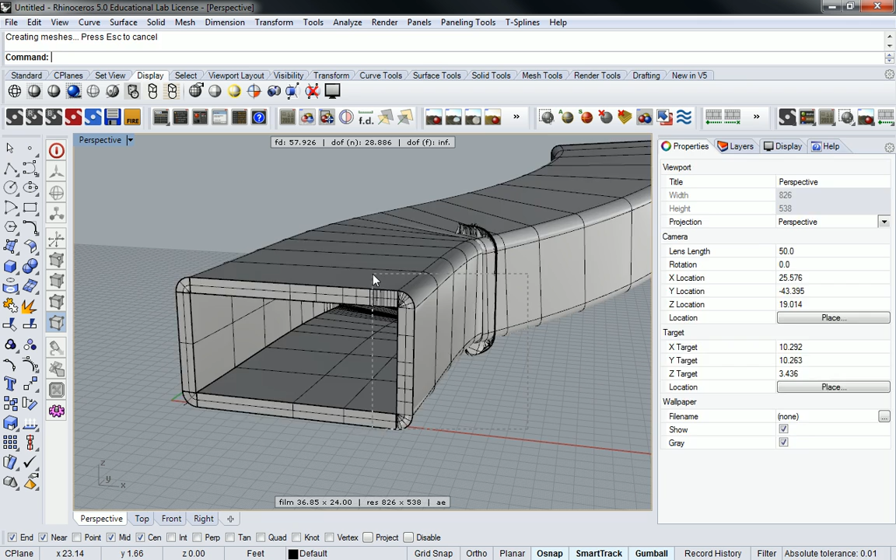You'll notice I have a lot of my Maxwell stuff up. I'm probably going to leave the panels on my toolbar and not worry about it, but I will turn off this heads-up display because that's going to be really annoying. If you recall, that's this toggle button right there to turn off those settings in the perspective view.

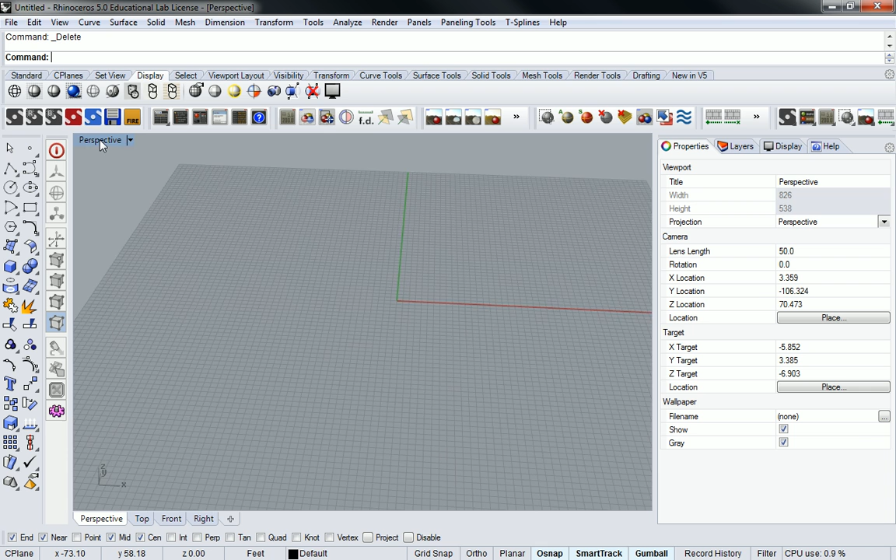Some of you guys have been asking about how project works, right? This is going to be a way for you to start using project as a way of controlling the geometry. So I'm going to create a simple tubular structure that just steps up in elevation. Then I'll show you some of the features Rhino has to actually blend and smooth certain surfaces.

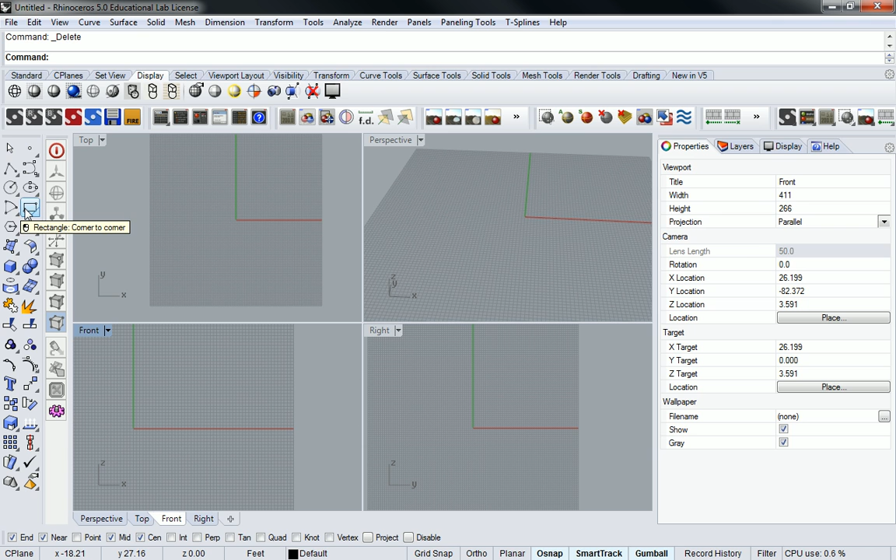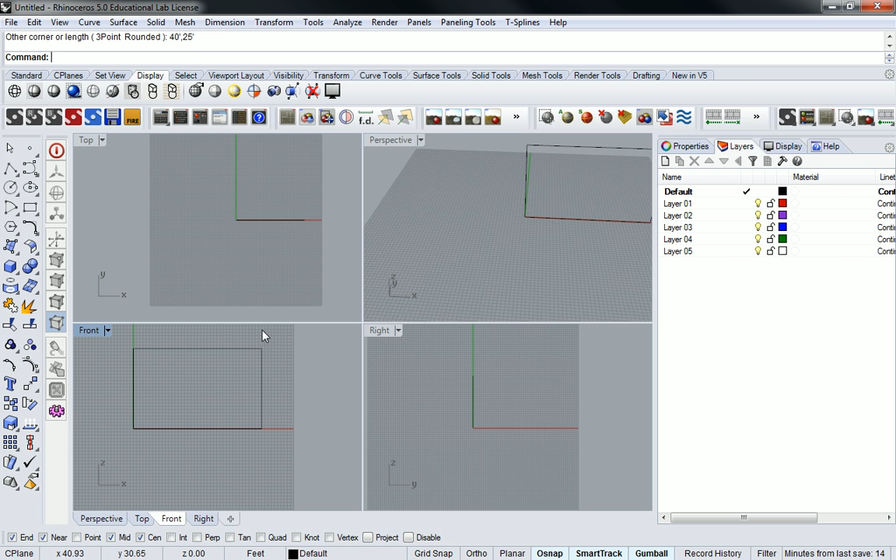Let's start with basically just a profile. We're going to create a rectangle, but since it's architecture, I want to create it in the proper plane, the front view. So this front view is where I'm going to start. All I'm going to do is create a rectangle, set it to 0,0, and make it something like 40 feet wide by 25 feet tall.

So what am I doing with this? I'm creating these tubular structures, and all I'm going to do is step it up once and then carry it off to the side. But first I've got to make that first leg. So all I'm going to do with this, with the gumball, is use it to create an extrusion.

If I hit the Alt button and click and hold it, guys, hold it, then click on the green arrow, I could create a duplicate and then loft the two together. But if the distance isn't necessarily critical, if I want it to be sculptural but also controlled, I can just Alt click and then hold Shift and drag it, and it actually creates an extrusion instead.

Yeah, it's weird, I thought there was a different hotkey for it. I thought there was a way you could hit them both and click the button to make it go and it would extrude. But for some reason it wasn't working for me the other day. I tend to get mixed up with these after time, but you have to hit Alt, click on the axis and hold it, then hit Shift and drag it. It's weird, I'll go back and do it again.

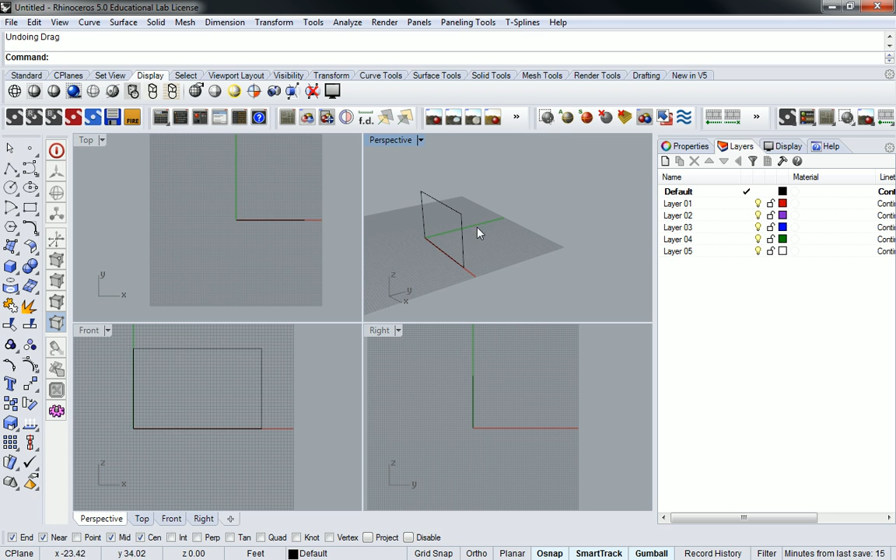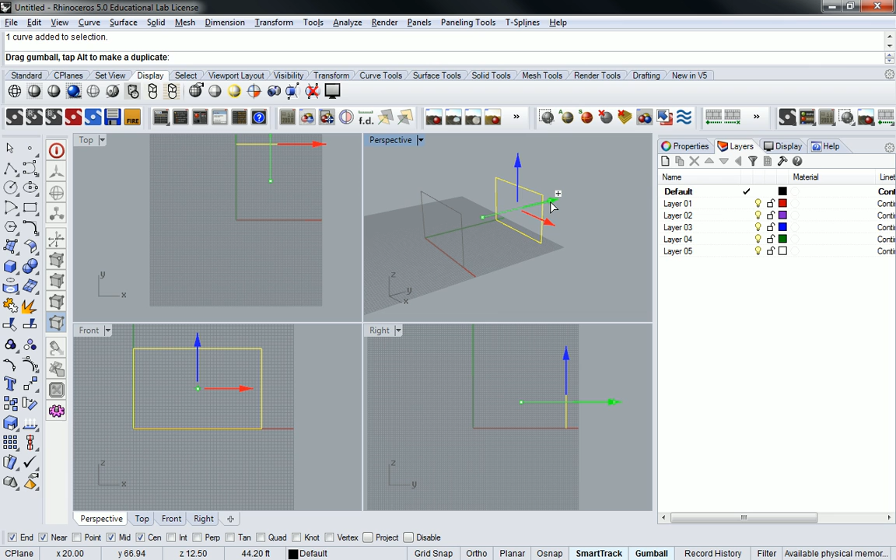So you select that, Alt button, hold it, click it, hold it. Oh, I said Shift—it's actually Control, my mistake, I had to look down on that one. Sorry. I'd be a really bad piano player. Anyway, hold Control and drag it back, and it'll extrude. If I mess that up again, guys, just shout it out and correct me, because long day. Any questions on that so far?

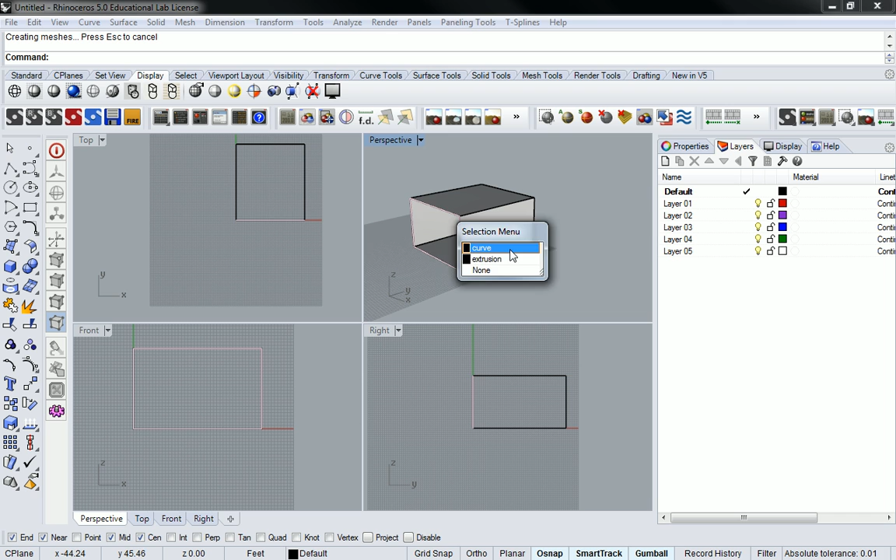Here's the cool part, or at least what I think is the cool part. I can simply grab this curve, copy it to the back side of this thing, and then just have at it and go for more. There are a few ways you could do this, you don't technically have to copy it, but simply put, I'll just copy this and put it on the back. And then I have this back one that I can work with.

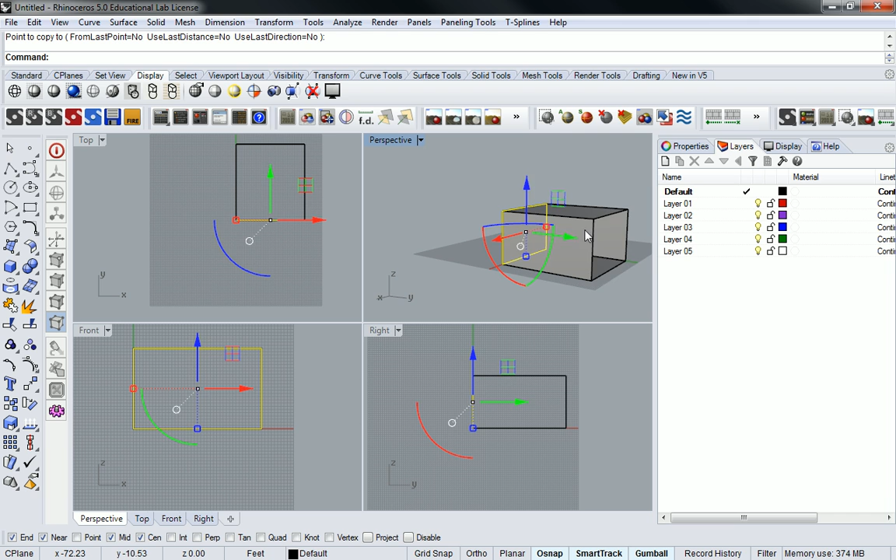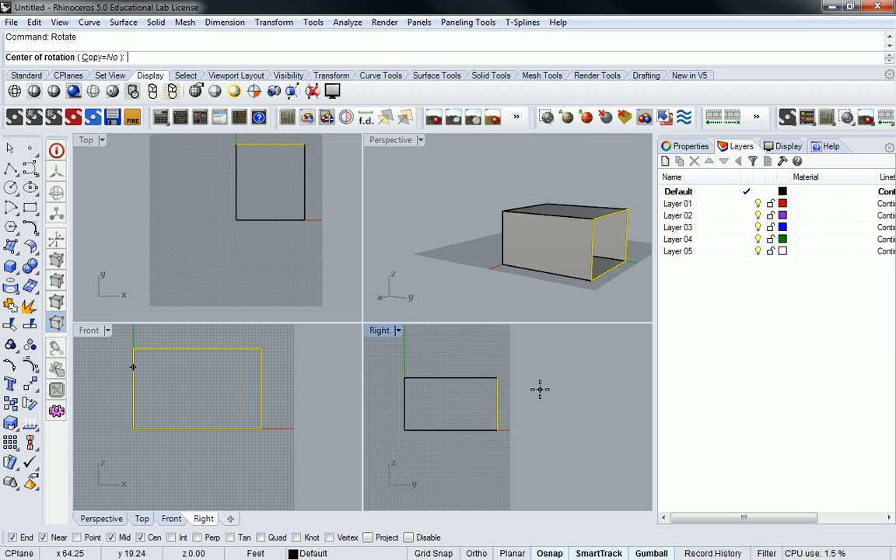See this right-hand view? If I want to create my extrusion going the opposite direction, going upwards, I can do that here by typing in the rotate command. Instead of using the gumball, typing in the rotate command allows you to set a different center of rotation than the center of the object that the gumball defaults to. Does that make sense? So I click on the bottom end here.

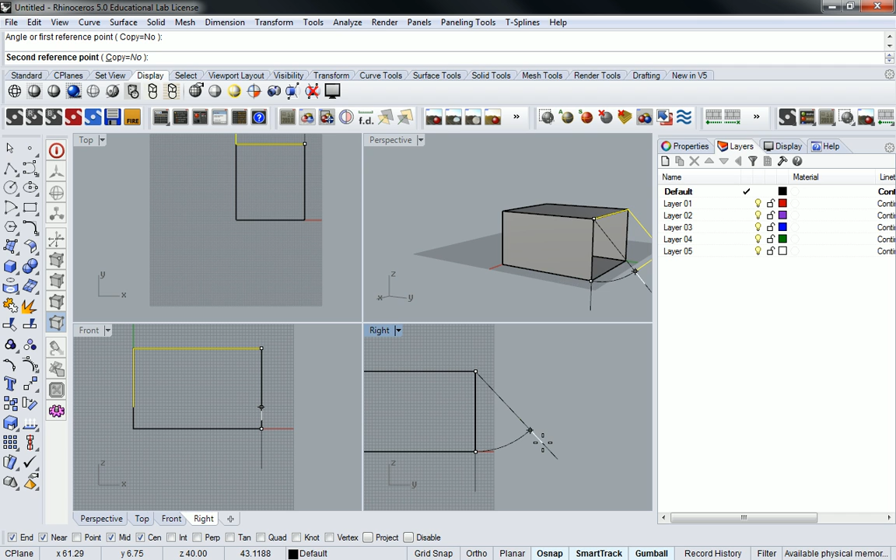Because I'm operating in the right view, it defaults to the orientation of the right view, which is nice. If I switched to the front view, it would change orientations. But I want to rotate from the bottom, and go 45 degrees up, so I'll just say 45. And there you can see my profile now is leaning upwards, and I'm ready to go again. I just select this thing, Alt click, Control, pull.

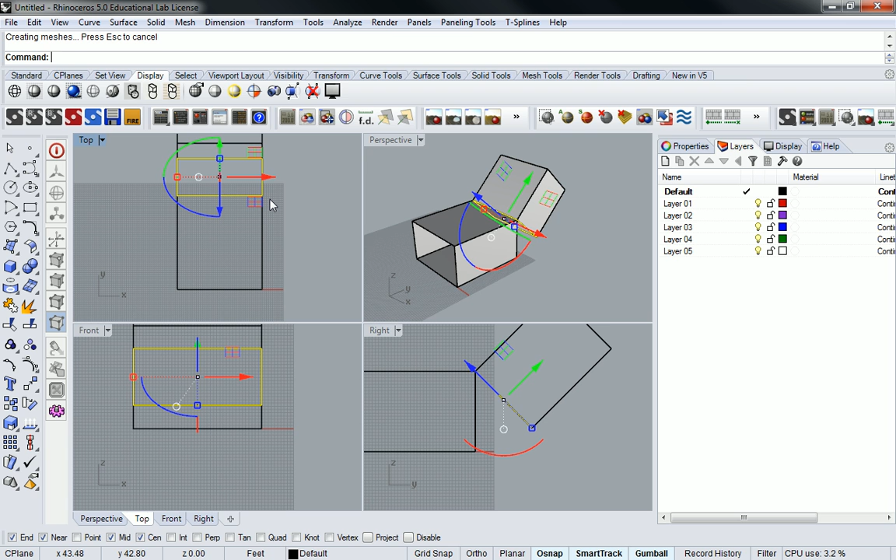How far back did you move the first one? It went approximately 50 feet, I just pulled it back to almost the end of the grid. It wasn't exact, I didn't do an exact number. You just selected the curve, right? Yeah. How'd you do the command again?

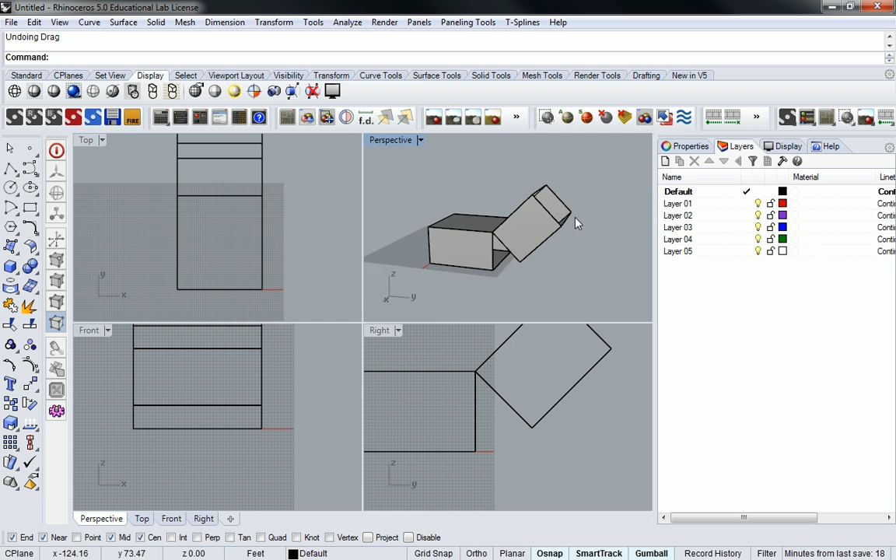With the gumball, let me grab this one and go the other way. Do Alt, click, Control, and then drag, holding them all down. Yeah, it's crazy weird, but it's easy once you know it, sort of. Alt, click, Control, drag, yes. I'll try to keep those as simple as possible for you guys—that's the only one that takes like 4 steps.

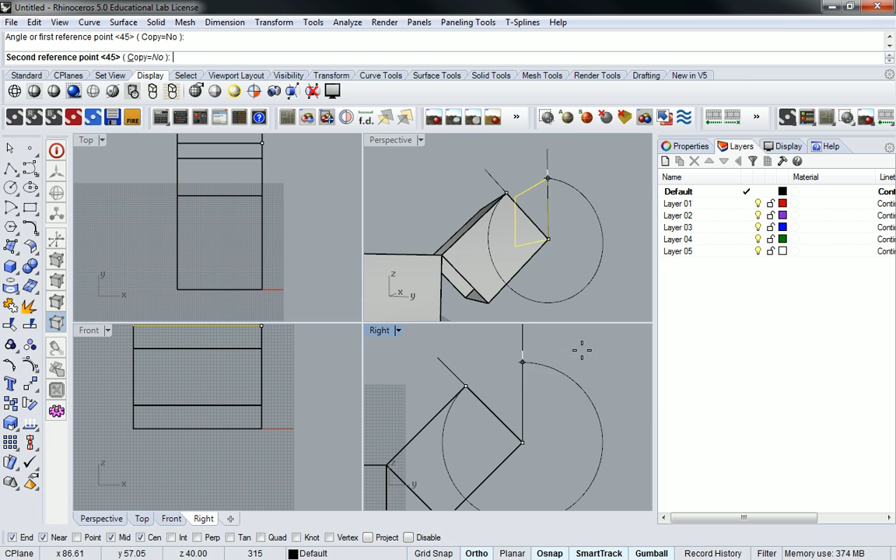Anyway, so I'm just going to keep going with this process. I'll copy this one back, go from this to there, grab that one, go back into the right view and rotate it—from here to here. And this time you don't have to type in 45 degrees, you can just hold Shift and it'll lock to the top axis, or any axis it's defaulting to. So I'll just click, and now it's straight up again.

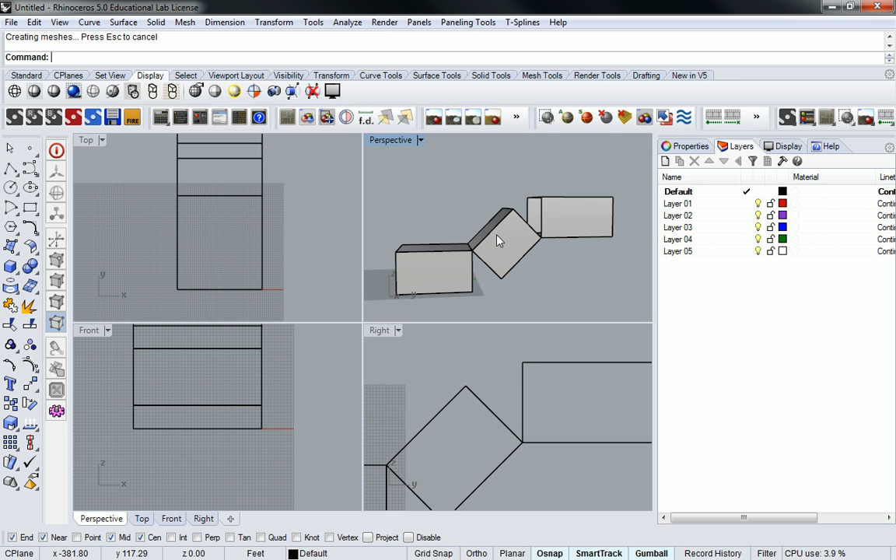So I am going to pause here before I proceed. Are there any questions right now? All right, so I'm going to give you a chance to get caught up, because we're going to need to be here before we move on.